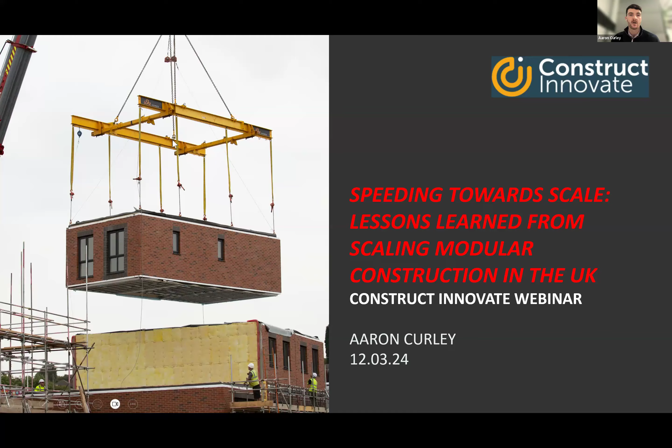I think it's probably been widely documented around some of the large failings, particularly with modular. But what hasn't been talked about as much are some of the lessons learned, the positive things that have happened, and then of course some of the challenges that arose.

So quickly, I'll be giving the case of Ilke Homes. I worked at Ilke as a program manager, supporting the setup of their PMO function. I'll get into more detail on Ilke Homes and who they were.

We'll then talk through some of the modular successes from Ilke, what they actually did well, and some of the lessons learned that might be applicable to people approaching modular in Ireland and other MMC categories, particularly around product design, the manufacturing process, and the DFMA approach.

I'll also go through some of the scaling challenges, in particular with Ilke Homes, but also what was felt across the modular industry in the UK, before summarising some of the lessons and considerations for Irish MMC companies.

So very quickly, many might already be aware of who Ilke Homes were. Ilke Homes were established in 2018 and were at one point the largest low-rise modular construction company in the UK. They had an ambitious vision to become one of the top 10 builders by 2030, and the business model was focused on creating a standard modular product and reducing the labour cost actually required to build that product, which we'll get into in more detail.

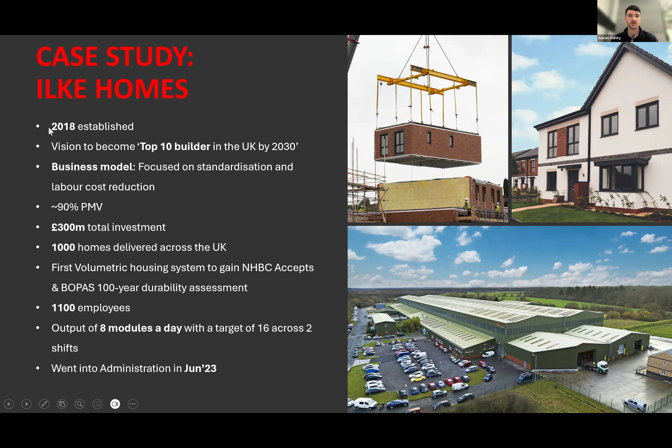I think it's probably worth noting, just to give you a sense of the ambitious scale. I joined the business in March 2021, but there was about 350 employees, and in the space of a year that grew to 1,100. Whether that was the right or wrong approach, we'll come on to that as well.

The ambition was to grow to 16 modules a day, so approximately it was 2 modules per house. They were achieving 8 modules per day before they went into administration. We'll get into more detail about what that process looked like.

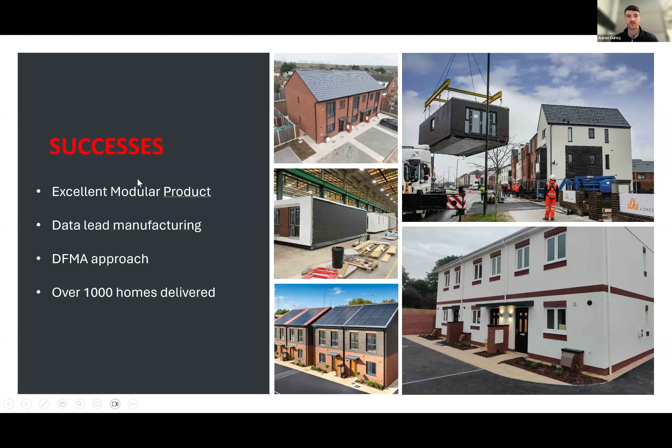So, highlighting some of the successes, Ilke was regarded as having an excellent modular product, in comparison to probably some of the other large UK companies that unfortunately didn't make it either. The manufacturing concept and the product, the modular product, were one of their strong points, along with the DFMA approach. And the fact that they successfully delivered over 1,000 homes showed that they had a model working, albeit they were unable to make it profitable before running out of money.

Going through some of the approach to the modular product, and bearing in mind for people approaching MMC, particularly modular in Ireland, there was significant upfront design, R&D, and close collaboration with customers, designers, and manufacturers to try and establish a standard modular product. As mentioned, the business model was focused around replicating many of the automotive principles.

Typically in the North UK, there is existing automotive expertise from an engineering perspective. So before any factory was laid out, there was significant upfront investment deciding what the standard product was going to be, how it would work, and that collaboration operated, as mentioned, from the customer design but also with the manufacturing team as well.

Before agreeing with clients and building a pipeline of products, they were very careful about how they were actually going to manufacture that to support the scale and growth plans. Some of those automotive principles, which we'll touch on shortly, are very much around creating a standard chassis design, implementing sub-assemblies, managing product release workflows, and a focus on repeatability and familiarization as well.

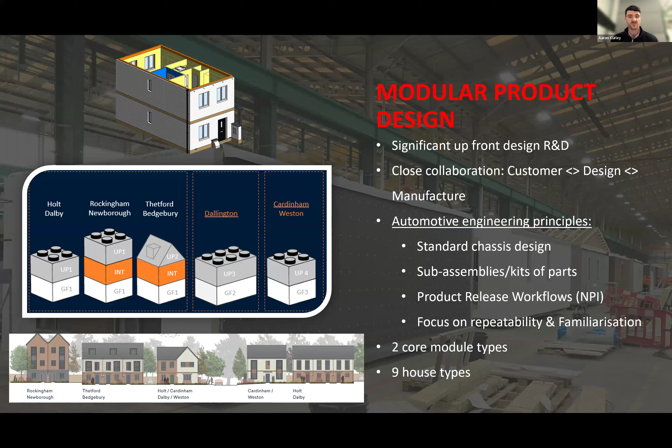On the back of that, and through all of that upfront investment, they settled on 2 core module types, which was a ground floor and an upper floor. They also had some room-in-the-roof modules, which were all built on light gauge steel frames. Through those 2 core module types, there were 9 core house types, which you can see outlined on the bottom of the screen.

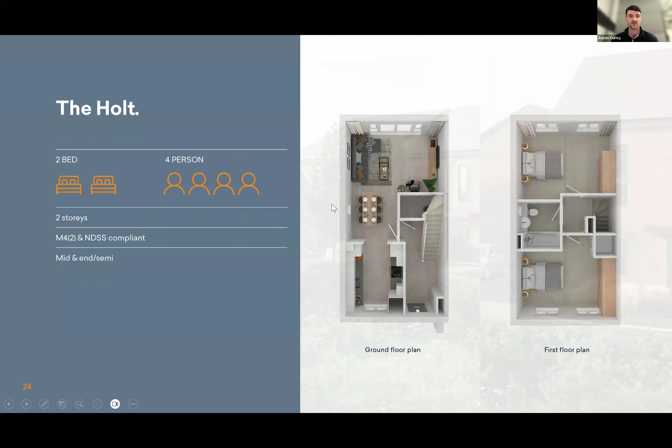So again, The Holt, this was one of the standard Ilke house modules. That gives you an overview of the typical layout. The modules were about 4.9 meters wide by roughly 9 meters long, and they all had a standard chassis design to help improve the operational management of each of the modules as they went down the production line. You can see it's the same size modules with a slightly different internal floor configuration for the second floor, again to meet customer requirements.

There was a key concept around creating the illusion of mass customization. So using a standard module type, how could we meet the different demands and the product typologies required for customers to help us build that pipeline? That was one of the key strengths of Ilke as well - they had managed to build a pipeline. They had over 2,000 houses in contract before they went into administration, which, as I'm sure most are aware, having a pipeline is key to support scaling modular manufacturing.

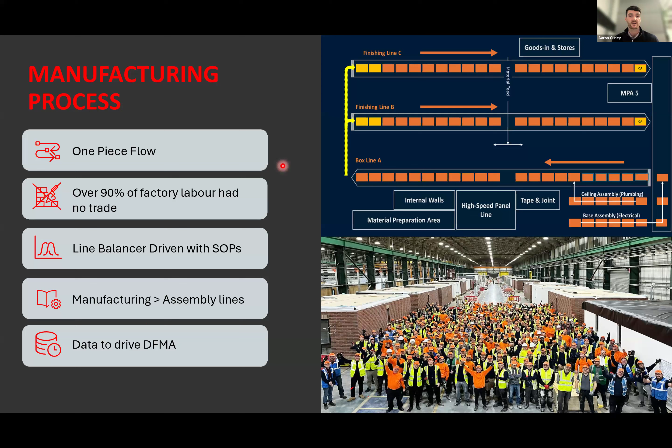One of the key benefits of having that level of data at a task, timing, and material level really helps to understand where to focus and where to value engineer the product. People use PMV, pre-manufactured value, which is about taking work content from a traditional construction process back into a factory. But I think the DFMA approach takes it to the next level, looking at the labor content and work content to complete each task, then working with your design and manufacturing team to value engineer and improve how the product is put together.

There could be lessons learned here for how people might approach getting their product into a factory, looking at modular and panelized solutions. A strong approach was having a manufacturing engineering team who worked on the process, not in the process. They basically acted as the conduit between the production team and the design team, using the production data to improve how the module was put together.

This was coupled with what was called product coaches, who worked on the production line with the production team and operatives to explore opportunities for design improvements. This was then categorized using techniques like Pareto analysis, trying to evaluate where to prioritize improving the overall design. This went through virtual and physical prototyping before approval.

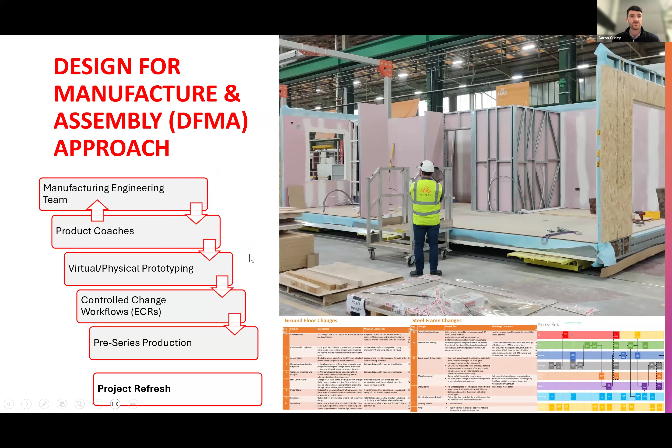If approved, it went through a controlled change workflow to help manage and test it on the live production floor without doing it at scale. If everything was happy, they would go through what was called a pre-series production - again replicating many workflows taken from the automotive industry. One of the key projects at Ilke was called Project Refresh, where they managed to take all the key learnings over the first 2 or 3 years on how to improve both the design and the process, which allowed for huge efficiencies overall.

Just to quickly run through some examples from the DFMA perspective, there was a lot of work done streamlining and value engineering the actual steel structure, which was all light gauge steel. As an example, they used the OSB racking design to remove the need for K-bracing and reduce the level of fixings. This was supported by computer modeling and reduced things like the internal walls from 1.6 to 1.2.

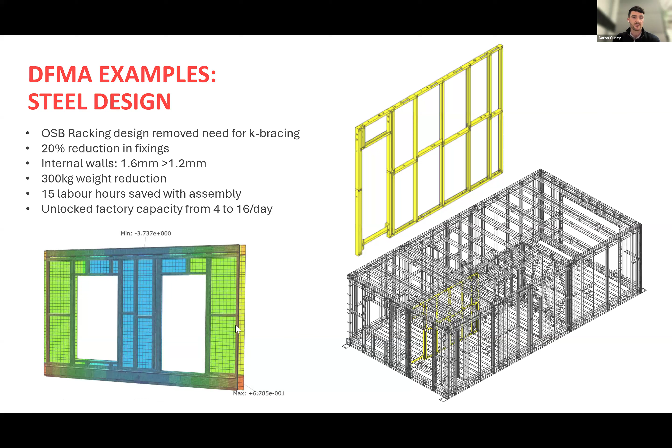This led to a saving of 300 kg weight, but also labor cost savings of 15 hours, which again comes back to improving how the module is assembled, as well as unlocking factory capacity given the size and constraints of the factory itself and the floor layout.

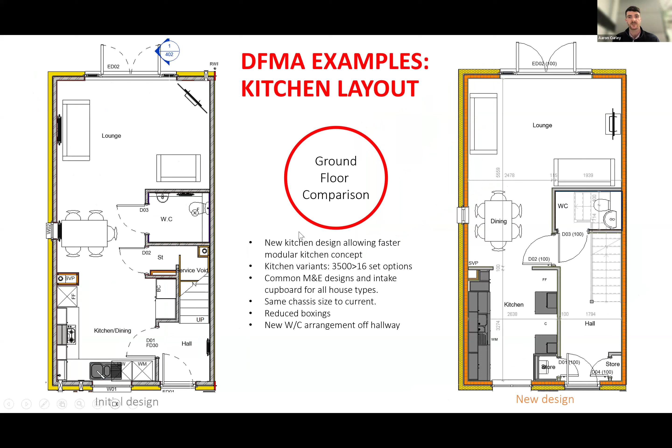Going through some of the other examples, they changed from an L-shaped kitchen design to a galley kitchen. This allowed us to use an external supplier to provide the modular kitchen.

Coming back to that assembly process, moving away from the manufacturing line, rather than having somebody on the production line trying to install a kitchen, it was already pre-assembled, delivered to the line side, and then dropped into the module itself.

Another point worth mentioning is reducing the number of variants, which reduced the complexity both from a procurement perspective and how the modules were put together. I think it was 3,500 initial kitchen variants down to 16.

Again, reducing the external options, we reduced the number of window variants from 135 to 12, improving the opportunity for creating standard sub-assemblies and speeding up that production process.

Some of the other examples include sub-assemblies, so plasterboard kits, modular stairs, redesigning the different module types to cater for, rather than having 7 different variations of the stairs, down to 1. This was provided by an external supplier and delivered line side, improving overall efficiency, reducing labor content and material costs as well.

Supplier innovation is worth touching on. M&E wiring looms, so some of the processes taken from car manufacturing again was using a pre-wired wiring loom that was delivered to the sub-assembly areas. This overall led to improvements in labour reduction and material cost reduction.

Some of the challenges that ilke faced, many probably have their own views on this. From being inside the camp and talking with some of the ilke alumni, there was an overall consensus that they scaled too fast, too quickly. There was an awful lot done correctly from the manufacturing process, and they really began to develop a working manufacturing process, but did not give it enough time for the internal processes to refine and mature.

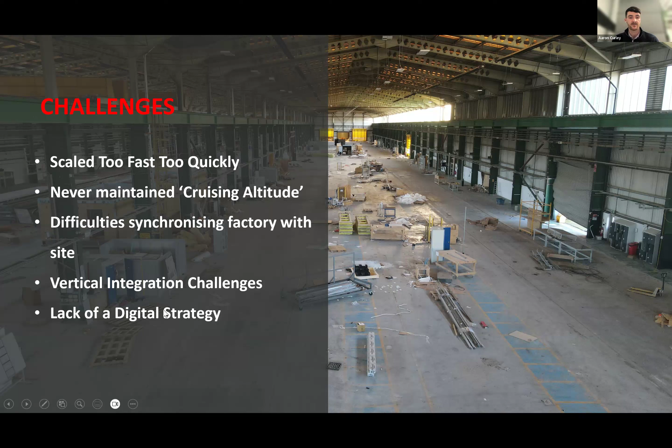Some of the other key learnings and challenges was around difficult synchronizing factory with the site teams, trying to manage, once the factory is up and running, how you would install and hand over the last remaining. Vertical integration is tied in with that, and having a clear IT strategy.

Summarising that quickly into lessons learned for the Irish market, open collaboration is key at all levels. ilke were quite strong in internal collaboration and working with some clients, but where they maybe struggled, along with a lot of the UK, is collaborating across modular and MMC providers to build that pipeline and develop innovation through different suppliers and research bodies like Construct Innovate. It's worth bearing in mind to pool resources together to explore opportunities.

Look at the process as a whole. For anyone looking to scale, it's important to manage and understand how the site processes will be managed once you get the manufacturing process up and running.

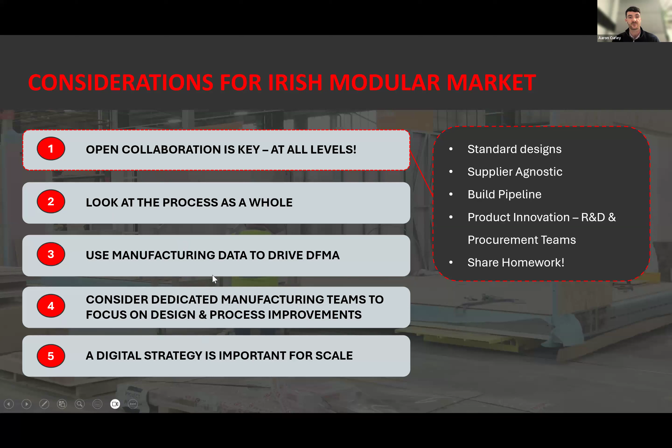Use manufacturing data to drive DFMA, having a view on task times and material times, and work from there. Consider using manufacturing teams, a dedicated resource to step back, look at the product and process, and act as the conduit between design and production teams.

The final point is having an important IT and digital strategy to make sure that as you begin to scale, your systems and processes are efficient and can work with your company.

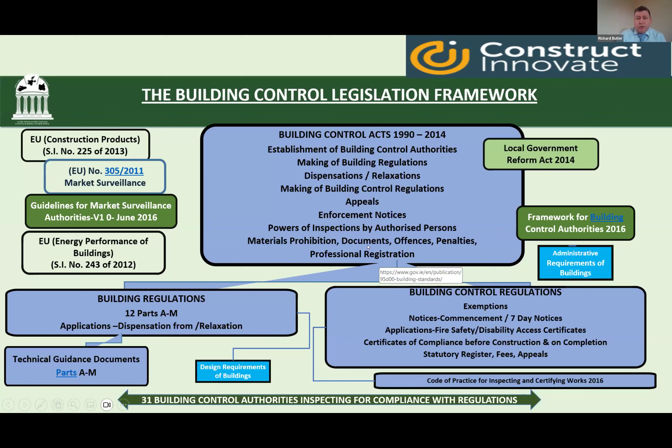When we go to the technical guidance document, there's 12 parts A to M, prepared to the second schedule of building regulations, and technical guidance documents prepared by the minister to show prima facie compliance with the building regulation. And then you have the construction product regulations, and how they all interact with it.

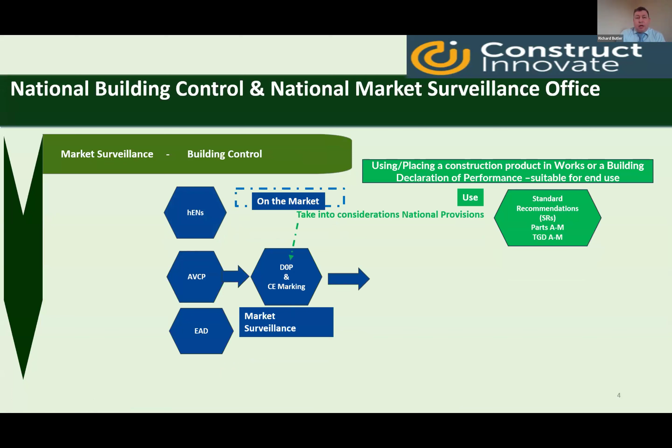Control and market surveillance are two different regulations. So you have the construction materials that fall under market surveillance, your harmonised European standards, your DOP and CE markings, your European technical assessment documents.

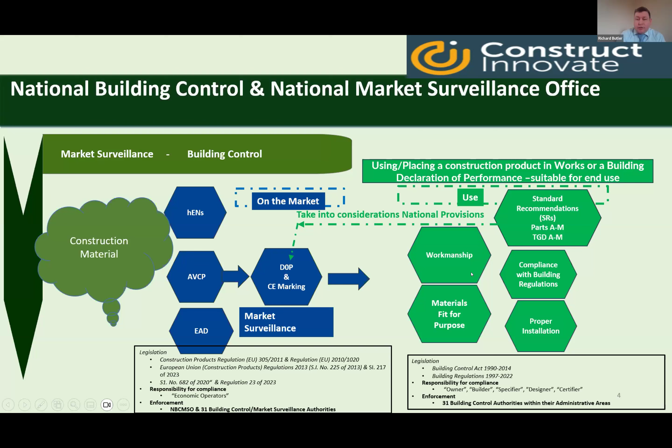When you come to your construction materials, construction work is covered under the building regulations part A to M, standard recommendations that are related to the use of certain products like concrete blocks, workmanship, materials fit for purpose, fit for use.

And this is the bit that does be missing from a lot of manufacturers: how do I get from here to here, and complying with the building regulations?

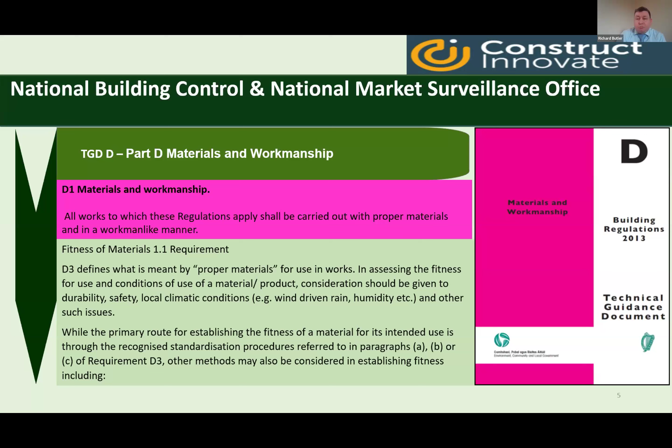The technical guidance document deals with materials and workmanship. All works to which these regulations apply shall be carried out with proper material and in a workmanlike manner. It defines what proper material is for use in works, in assessing the fitness for the use and the conditions of use of a material product.

Consideration should be given to the durability, safety, local climate condition, i.e. the wind-driven rain, humidity, and other issues that could affect the building material. So workmanship is key to the material. If the workmanship is bad, even though the material is good, it can lead to failure.

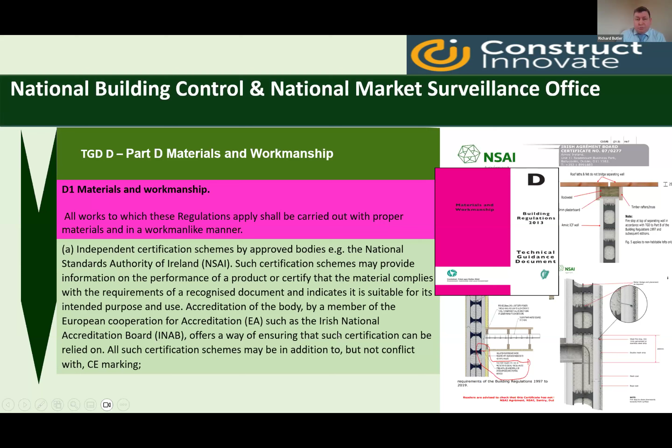So all work materials in it, so it gives ways to comply: independent certification schemes by approved bodies, national standards, such as certification schemes like NSAI, and BBA certs.

Unless they're assessed for Irish building regulations, they don't demonstrate materials and workmanship. Also, if you're getting agrément certs on that, do detail out exposure, do an assessment on the exposure conditions, references to approved installers, and also reference to maintenance to ensure that the product is suited for its lifetime.

This is where it states in the technical guidance document in point 1.0, the process of agrément certs applies to those products and processes which do not fall within the scope of existing construction standards, either because they're innovative or because they deviate from established norms.

The NSAI agrément process specifies testing where appropriate, and they issue a certificate. The certificate alone is not compliance with the building regulations. It still has to be built in accordance with the building regulations, all parts A to M.

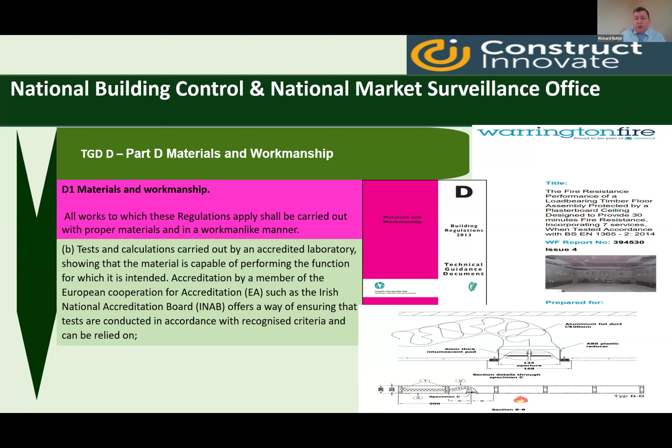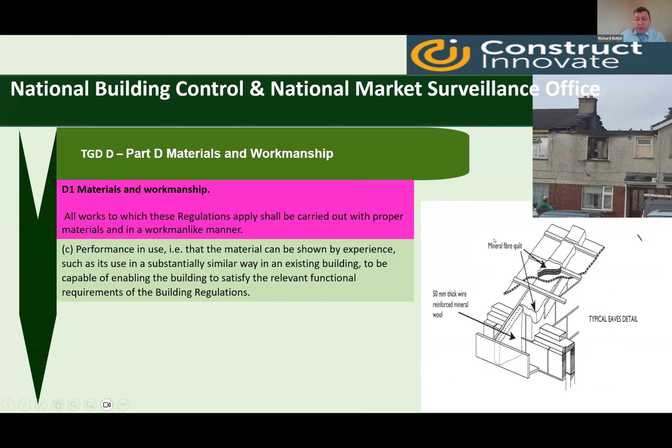Materials - the testing is one way of showing compliance, that it's fit for its intended use, and that may be a fire test in the case of floor or wall or ceiling, or fire stopping materials. It may be performance in use.

So this is the fire stopping detail between a separating wall. There is no standard test, but we know from experience, from the picture up there, that it works.

So the code of practice is something that all manufacturers of MMC products should be aware of. It deals with the designers and builders, which they fall under as well, but we're just dealing on the aspect of the Building Control Authority.

The Building Control Authority should process applications for fire certs and disability access and issue decisions on the application, validate and register commencement notice of 7 days and accompanying certificates, notices of assignments and notices of undertaking, validate and register the certificate of compliance and completion, maintain a public register.

And Building Control Authority should maintain a record, including a record of inspections, undertake a risk analysis of each commencement notice submitted in order to form its own inspection arrangements, and advise the design certifiers in relation to issues of compliance relating to the building or works.

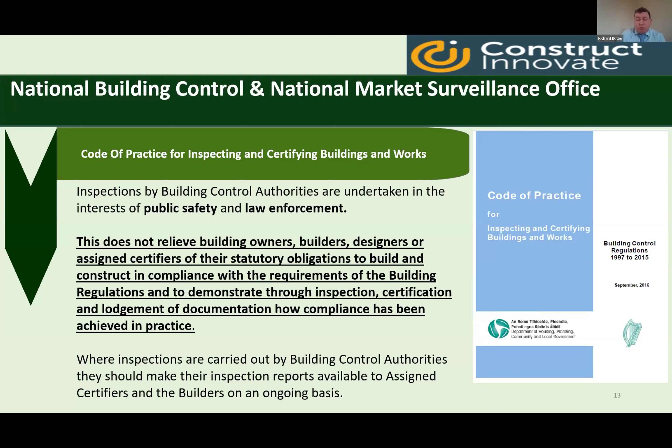So the code of practice for inspecting and certifying works: inspection by local authorities are undertaken in the interest of public safety and law enforcement. This does not relieve building owners, builders, designers, or assigned certifiers of their statutory obligations to build and construct in compliance with the requirements of the building regulations, and to demonstrate through inspection, certification, and lodgement of documents how compliance has been achieved in practice.

Reform of building control covers education and training, compliance support, inspection, and market surveillance. The BCMS provides for the administration of building control matters, including commencement notices, certificates of compliance, applications for fire safety and disability access certificates, dispensations and relaxations from building regulations, and the building control register of projects. It also provides a useful source of data for government and industry.

So what are the building control regulations? They apply to new buildings, extensions, material alterations, and changes of use of buildings. They promote observance of the building regulations by supplementary powers of inspection and enforcement given to building control authorities.

Building control regulates the commencement notice and 7-day notice, fire safety certs, dispensation and regularization certs, maintenance of a register, fees, and statutory registration of building control activities.

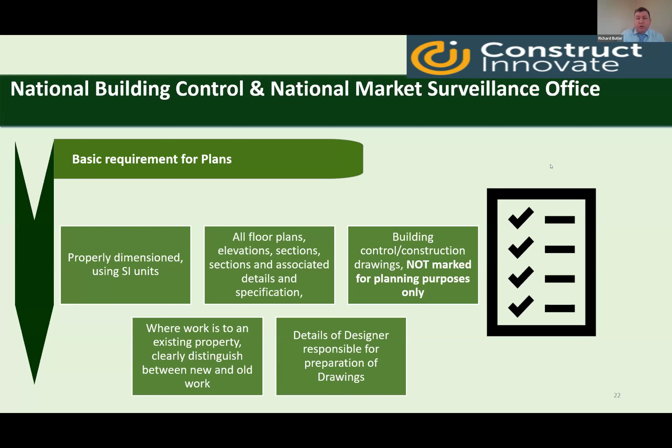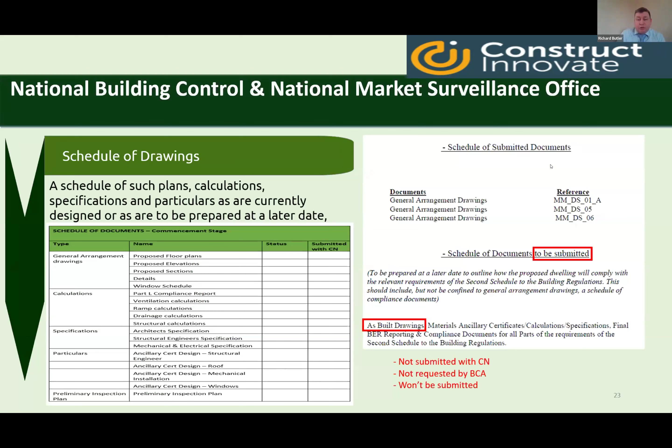A schedule of drawings should accompany the notice, detailing what's designed and what's yet to be designed. So if you're submitting a commencement notice, you'd expect your foundations to be designed as part of that notice because you're going to commence in 28 days. Or if you submit a 7-day notice, you're starting after 7 days.

For compliance with the regulations, design has the meaning assigned to it in the Building Control Act 1990, and includes the preparation of plans, particulars, drawings, specifications, calculations, and other expressions of purpose according to how the construction, extension, alteration, repair, or renewal concerned is to be executed, and 'designed' will be construed accordingly.

There is information in the BCMS detailing what you need to submit, and that's a minimum to get a notice. More complicated buildings would need more drawings, and this is what's required for each type of notice: whether it's a design certifier, assigned certifier, nominated builder undertaking, preliminary inspection plan, or general arrangement drawings, all are listed out for you.

So submitting a certificate of compliance on completion is required for a commencement notice with additional documentation or a 7-day notice, and they must demonstrate that they've complied with parts A to M and upload a schedule of documents.

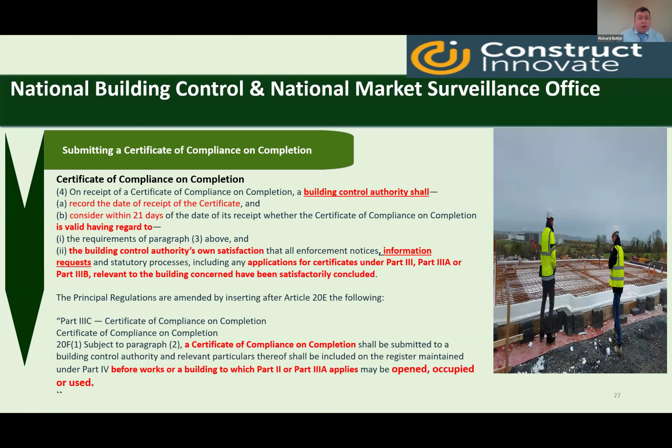Once they submit to the Building Control Authority, they have 28 or 21 days to validate it, or they can seek revised information, or invalidate it for reasons outlined in schedule 3 or 4. But validation is solely based on the assumption that the facts stated in the form of notice, application, certificate, or declaration, and the attachment statutory supporting compliance documentation, are true and accurate in compliance with the requirements of the legislation.

If at any time after validation it is found that there are inaccuracies, it may cause the notice, application, or certificate to be subsequently invalidated. Under Section 16 of the Act, any person who contravenes by act or omission any requirement of this Act or any order, regulation, or notice under this Act shall be guilty of an offence and may be prosecuted, with penalties under Section 17 of the Act. So prosecution carries a cost.

Building control authorities are not planning, roads, water, or waste authorities. So a valid commencement notice in itself does not mean you have legal entitlement to commence a work or a building, and any issues outside the remit of the Building Control Authority will be brought to the attention of, or complaint made to, the relevant authority. So the onus is on the owners, builders, designers, and assigned certifiers.

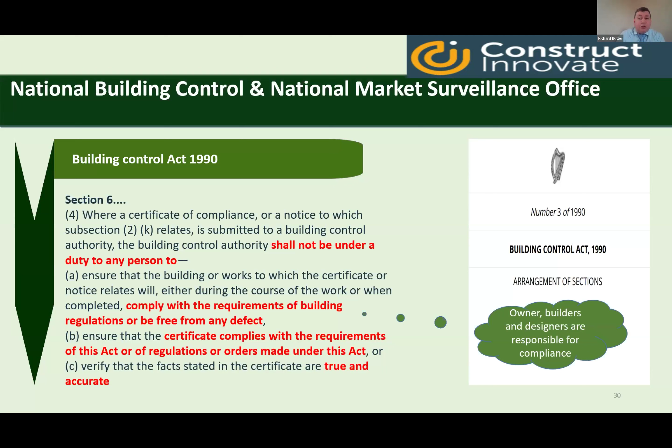So the building control authorities have a big exemption. The responsibility for complying with the legislation, the building control regime, and the building regulations rests with owners, builders, and designers, who are responsible for compliance.

So thanks, and I'll take questions after.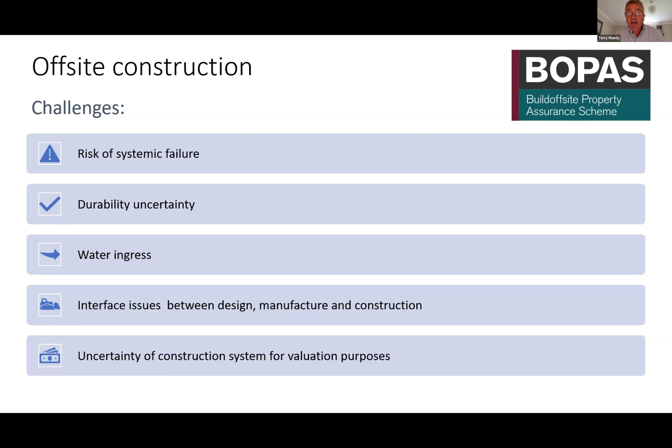Interface issues between design, manufacture, and construction, and uncertainty of construction system for valuation purposes. So we spent about a year dealing with these issues in terms of introducing controls which would provide assurance to the lenders as to the integrity of assured accredited systems.

We carried out 3 pilots, and the ultimate outcome was an endorsement by the lenders in respect of BOPAS, the Buildoffsite Property Assurance Scheme. It comprised a process accreditation, a 60-year durability assessment of the construction system, which has now been extended to 100 years, as you heard in the ILCA presentation, and a web-based search facility.

A certificate is also issued to the accredited organizations, and they are accredited for design, manufacture, construction, or project management of any one of those 3, in the event that the entity that's accredited isn't actually performing the work themselves but are subcontracting it.

The purpose of the website was to demonstrate the status of an accredited manufacturer to stakeholders or lenders, and they could demonstrate that the construction system was BOPAS accredited, the constructor was BOPAS accredited, the manufacturer was BOPAS accredited, and the site was BOPAS approved.

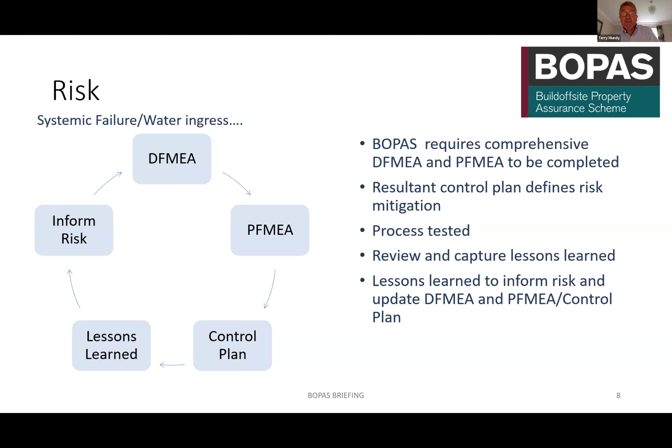Speaking of risks, one of the key features of the scheme is it's risk-based, and BOPAS requires comprehensive design failure mode effect analysis and process failure mode effect analysis to be completed. The resultant control plans define risk mitigation. The process is tested, reviewed, and lessons learned are captured to inform risk and update DFMEA, PFMEA, and the control plan going forward. So we have a bit of a virtuous circle there.

That's very high level. Just on the next slide, we look at a specific issue: DFMEA looking at PFMEA looking at the potential for water ingress. We're looking at every stage through manufacture, storage, transport, and assembly on site to understand where water ingress could take place and how that risk can be mitigated, what controls need to be put in place.

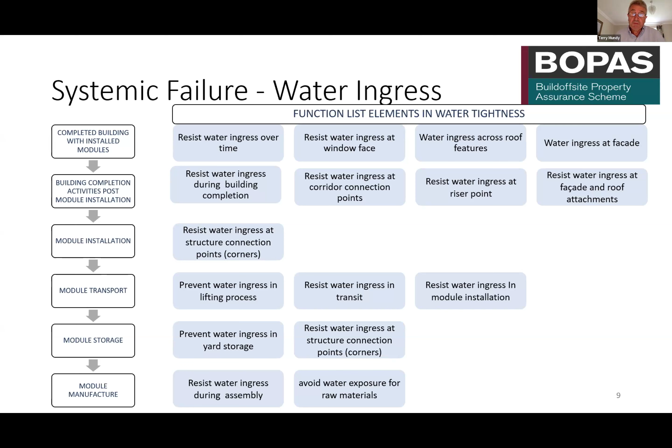So it's very much a systematic approach to establishing what the output is, which is a moisture control plan, which every organization is required to have.

So whilst BOPAS encompasses design, manufacture, and construction, I'm just really focusing now on the manufacture interface to construction and assembly on site, in line with the original intent of this presentation.

Continuity of accountability and responsibility through the interface between manufacture and construction is, of course, a critical element. If it's the same organization that is undertaking both the manufacture and the construction, then what we require is an assigned project manager who has end-to-end responsibility.

If it's a different entity undertaking the construction assembly on site from the manufacturer, then the accredited manufacturer must be accredited for project management of construction. That means they must have all the processes in place to oversee construction, and the person nominated to undertake that work must have an informed overview of construction and all the risks associated with it, as well as an understanding of the manufacturing processes involved, so they can understand where potential weaknesses may be in relation to the assembly and how to address those.

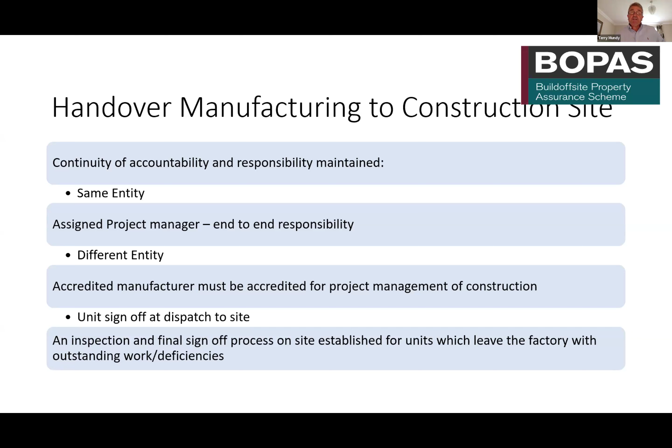Unit sign-off at dispatch to site: an inspection and final sign-off process on site is established for units which leave the factory with outstanding work deficiencies. Often we ask manufacturers what processes they have in place for dealing with units which leave the factory with still outstanding defects, and they always very confidently say it will never happen. In reality, it happens all the time. But the important thing is to ensure that the processes are in place for highlighting and signing off all those outstanding deficiencies at site.

Groundworks tolerances in terms of setting out can often be a problem, and what we require is foundation layout and excavation specifications handed over from the accredited manufacturer and signed off by the groundworks organization undertaking the work.

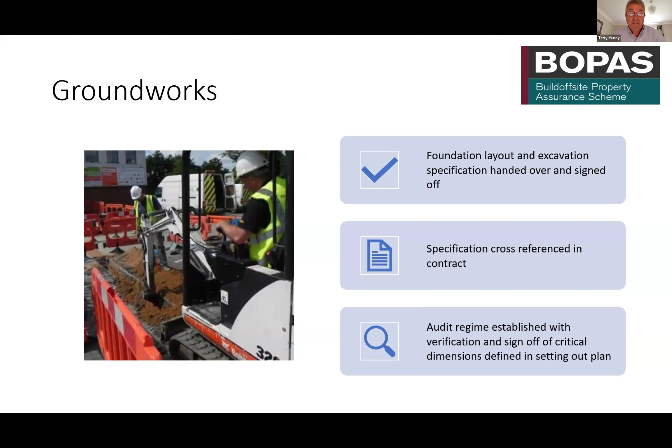That specification should be cross-referenced in the contract between the two parties, and an audit regime should be established with verification and sign-off of critical dimensions defined in the setting out plan by the accredited manufacturer.

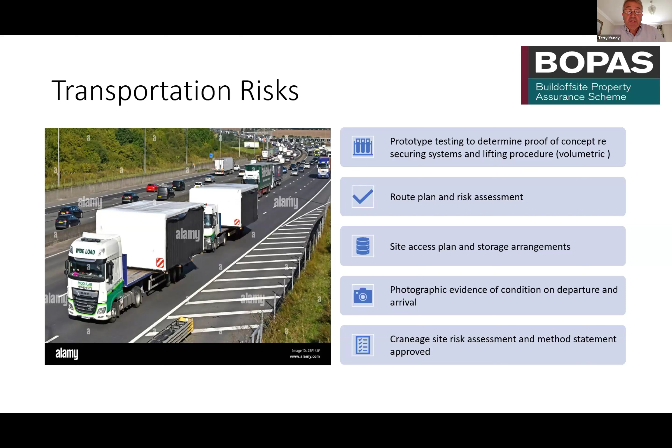Also, lifting procedures should be signed off and approved. Route plan and risk assessments should be provided by the transport company and signed off and approved by the accredited manufacturer. Site access plan and storage arrangements, and photographic evidence of condition on departure and arrival, ensure who may be liable for any damage that occurred on the way.

Craneage site risk assessments and method statements must be approved.

In terms of site organizational structure, on-site organization charts, including subcontractors with defined responsibilities, should be established. A competency matrix should be established for all staff on site, identifying their roles, the minimum qualifications required for each role, and the actual qualifications held by those individuals.

Any mismatch should be addressed through a training, mentoring, or supervisory process. Site supervisors should be qualified to SMSTS with 5 years experience.

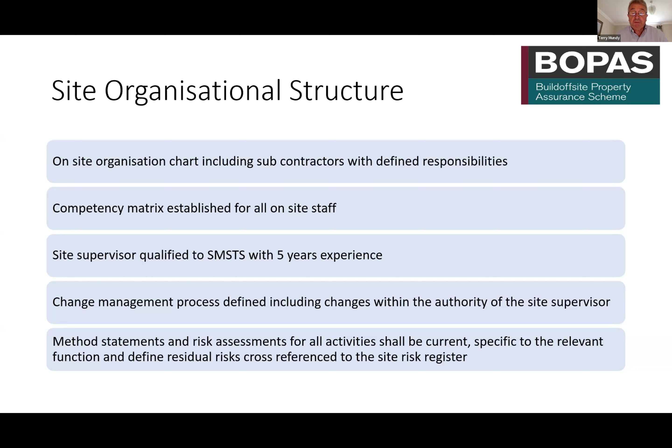A change management process should be defined, including changes within the authority of the site supervisor and those which have to be referred back to the design manager.

Method statements and risk assessments for all activities should be current, specific to the relevant function, and define residual risks cross-referenced to the site risk register.

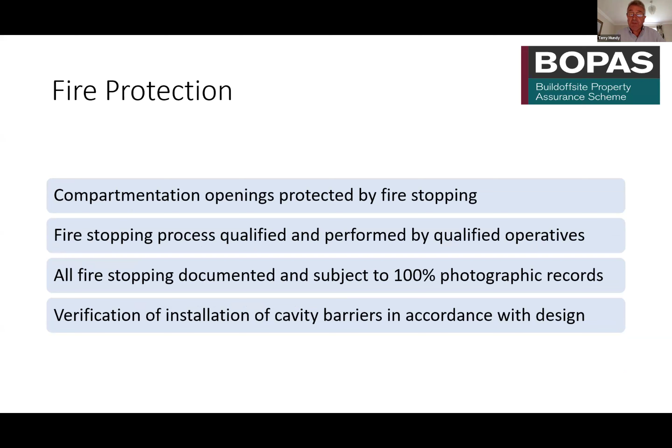Fire protection: compartmentation openings are protected by fire stopping. Fire stopping processes should be qualified and performed by qualified operatives. All fire stopping should be documented and subject to 100% photographic records, and verification of installation of cavity barriers in accordance with the design should be undertaken.

Handover to homeowner. This is a key feature really for BOPAS, insofar as many homeowners are left in a state of limbo, almost in no man's land, when they're moving into a new house.

We require that the handover pack should be in hard copy plus a DVD, or access to a portal with all the requisite information available online. The pack should comprise, besides all the usual features, inspector sign-off as having met all the basic requirements, construction system details, do's and don'ts in terms of what can be hung on walls and things of that nature, schematics of the various utilities, and examples of reportable defects.

This is quite critical because most defects are largely left to the homeowner to deal with, and they're called snags, which in many cases understates what the findings may be. So we class them as quality deficiencies, and anything found post-handover is classed as a quality deficiency, not a snag.